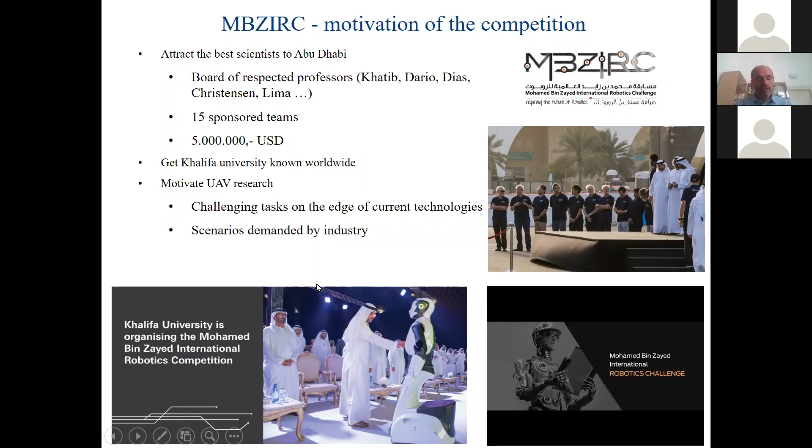This photo is here mainly to show the size of the team, which will progressively grow as the competition gets more complex. You can see that the Czech Technical University teamed with Penn and University of Lincoln. Penn was there mainly because of their expertise in low-level control, while University of Lincoln collaborated on vision at that time. Okay, I'll get on with it.

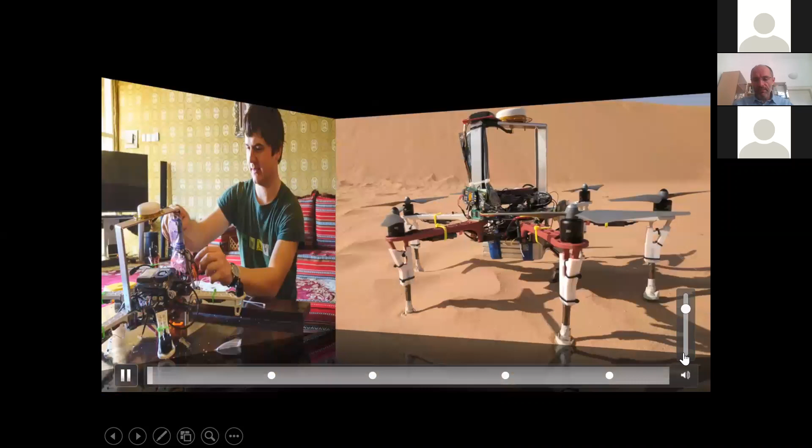So this is the preparation for the first challenge, and I will use it to introduce the tasks in the 2017 challenge. The first task is to find colored targets placed on small pillars, and here you see the training session. Our group really took the competition seriously, and they went to the desert about a month before, because conditions there are very different from what we have in Europe.

It's quite windy and sandy. So one of the tasks in the competition was to collect specific colored discs and drop them into a box. You can already see it's quite windy here, and this is the drop of the target. So this is some sort of collect-items-and-drop-them-into-a-predefined-box task, maybe also involving sorting, because there's more than one box.

The second task was to land on a moving target, which you will see later in the competition. There will be a moving vehicle with a landing platform on the roof, and the drone's problem is to find the vehicle and land safely within a predefined area.

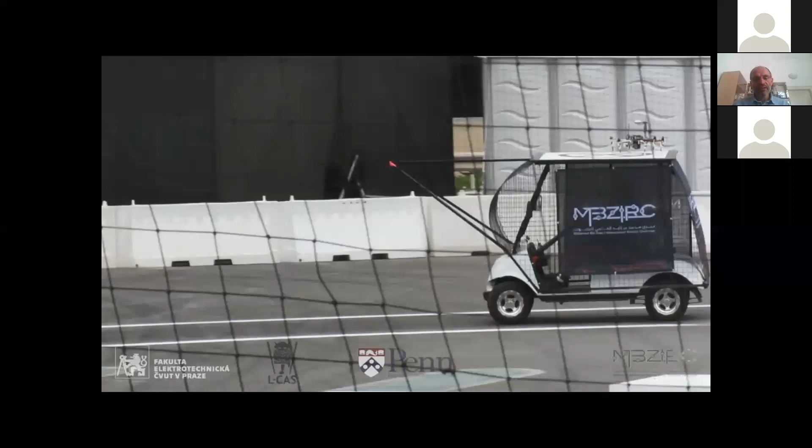So this is the second round, had to do it twice. You see the drone first localizes the vehicle, and then in this windy conditions, you have to synchronize with the vehicle, get the target, and here we were lucky. So it's just like on the edge, but it's okay.

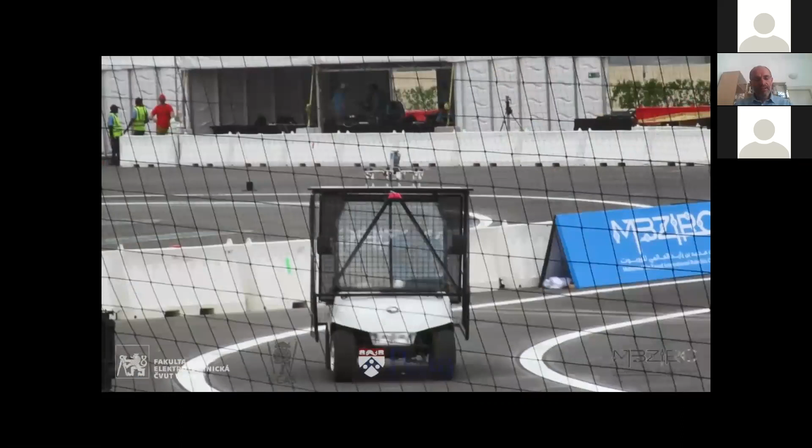So that's maybe you can think about as applications of maybe track a moving vehicle and land and deliver something while the object is still moving.

This is part 2 of the competition. You see those discs distributed over the area, over the arena, and the task is to collect as many as possible and drop them in the box.

Okay, and I think the different colors are rewarded differently. Okay, so I think that's almost all from the 2017 challenge.

You see all the nets around the arena. Despite that, I think one of the Japanese participants' drones had a sort of algorithm which had a go-home button if you lose your position in the arena. Unfortunately, they did not reprogram the home from Tokyo, so the drone departed on the east and was never seen again.

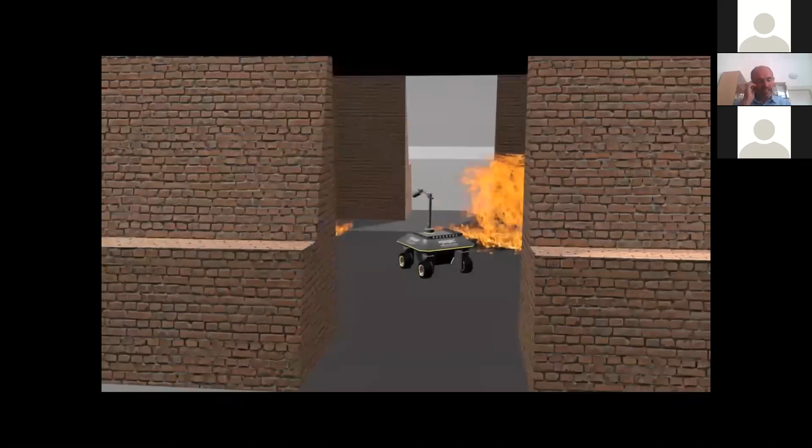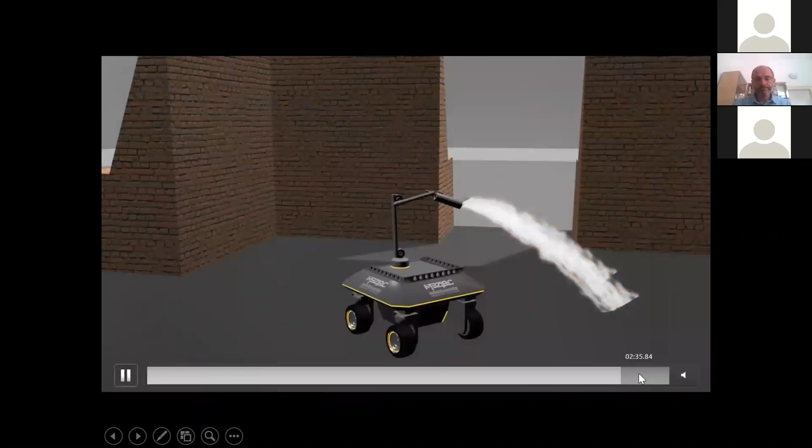Okay, so then it should collaborate with a ground-based robot, which could be much heavier. And again, the ground-based robot could put a blanket or water to quench or extinguish the fire. So in the grand challenge, you have to perform all three things.

Now, okay, fine. So how did it look in reality in the first task? There are 3 UAVs. 2 have to destroy 5 colored balloons, and the other one has to intercept the UAV flying with the ball. So that's at the top right here, now in the middle. This is what you'll have to catch, and then you have to pop or puncture all those balloons.

We are using a RealSense camera, which is RGB-D, and for capturing the ball we used a LiDAR. You'll see why. These balls, of course, are fairly easy to localize, but still the color changes according to daylight conditions.

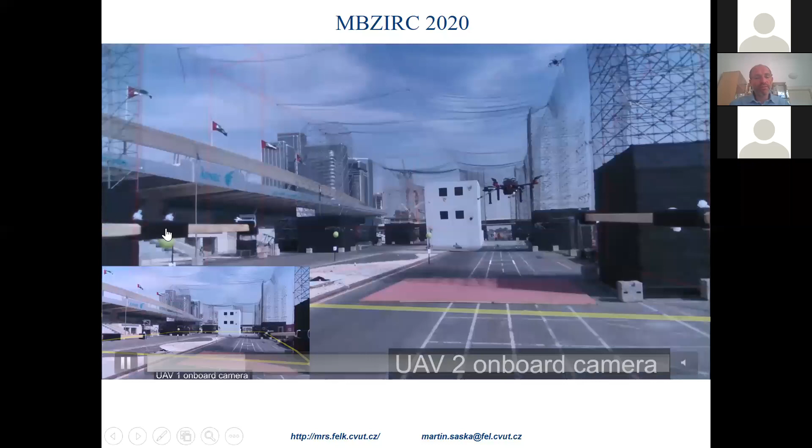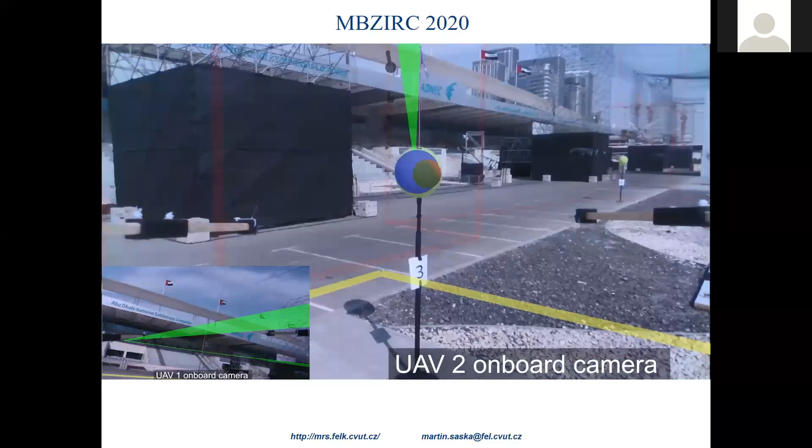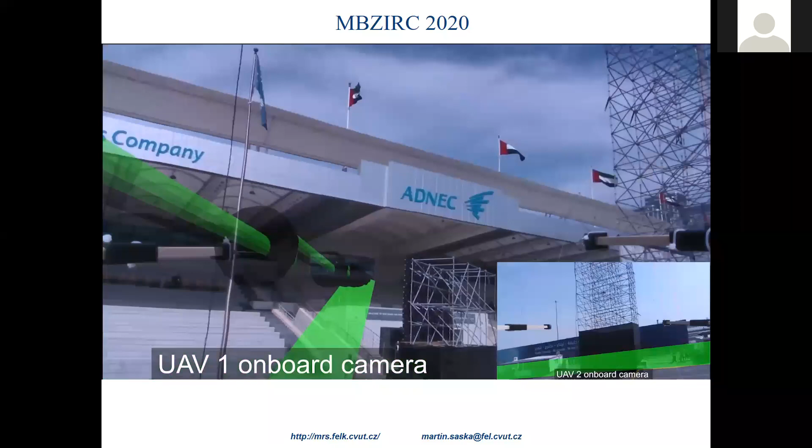We'll see a picture of the UAV. We also have to have a device to puncture the balloons, and they are at a fixed height. You know the height before, so we use for navigation just GPS and IMU, consumer grade more or less.

So in the end, our global position was quite imprecise. We could land in the predefined area, but maybe with 2-3 meters of integrated error. We had a LiDAR time-of-flight thing to get the height.

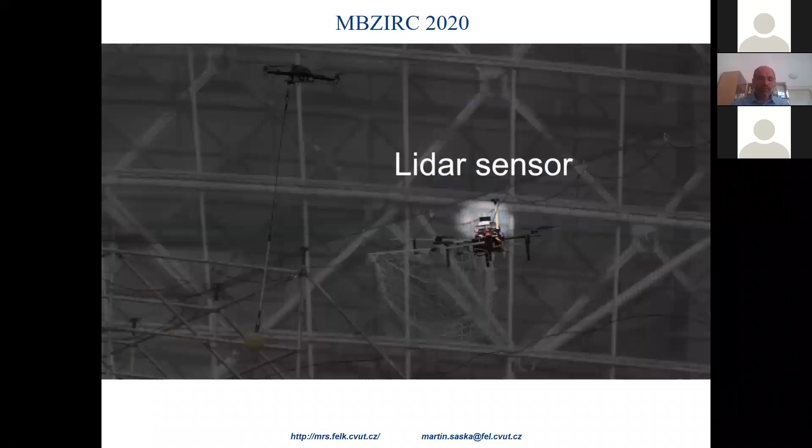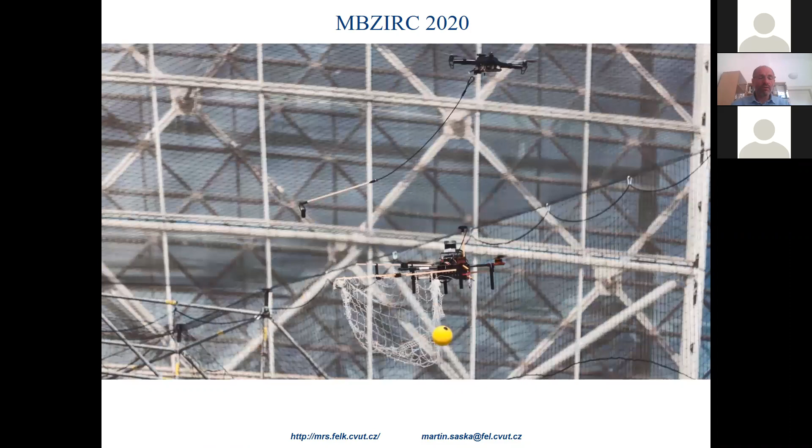For the drone interception, we used the LiDAR because it turned out that the cameras did not work. When we got very near, the ball was getting often out of the field of view. Or because it's also windy, and the drone creates some airflow around it, so it was difficult to keep it in the field of view.

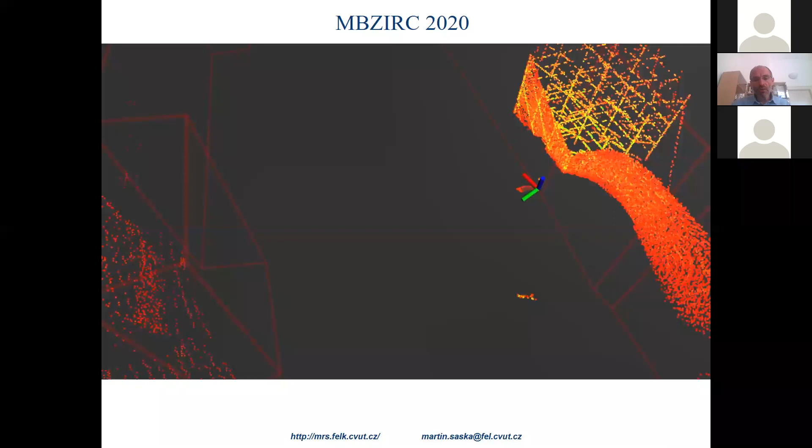So we had this lurking approach where first we localized the drone, which was flying on a fixed trajectory, again like an 8 shape. You didn't know where it would be a priori, you didn't know the tilt of the trajectory, but you knew roughly the size. It was like a 40 by 20 meter loop.

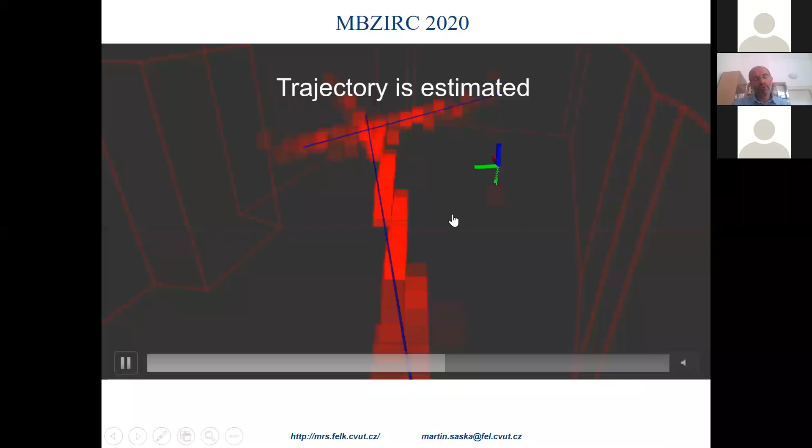And we sort of detected it. For the second round, we were waiting for the drone to come back. We managed to intercept it, but we couldn't hold it.

By the winners from Beijing University, they had a chasing approach, so sort of get hold of it and chase.

Yeah, so here's the flying thing. Okay, so we sort of hit the ball, but did not hold it in the net. You could see it was like a near miss.

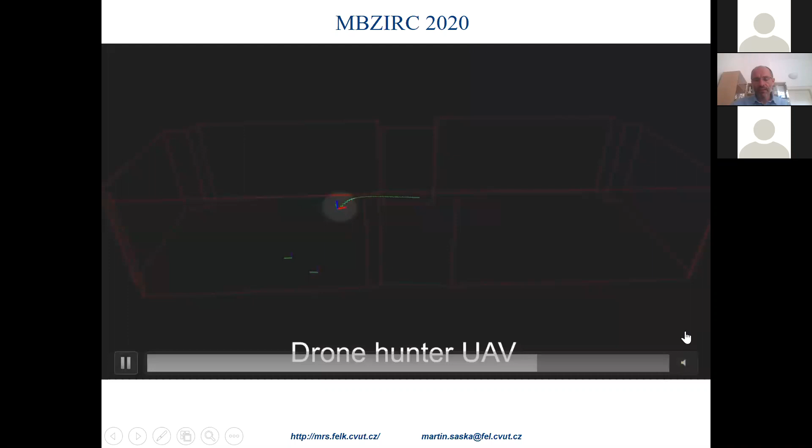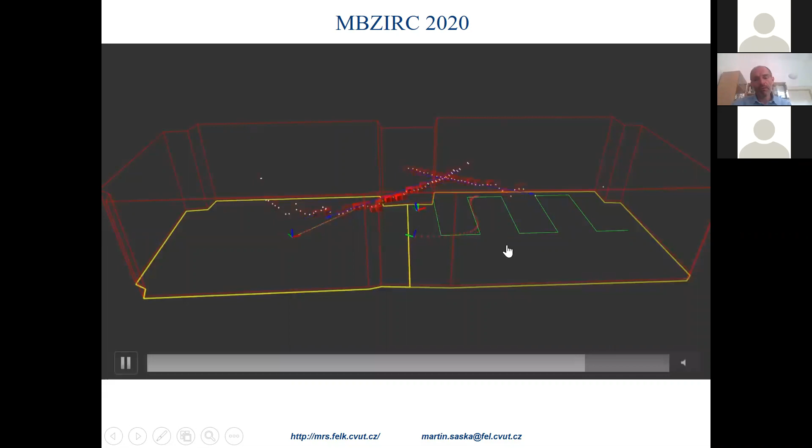So all of these tasks have to be completed simultaneously, which means that the robots, the UAVs, should not hit each other. But it sort of made it a little bit easier because this is the trajectory of the flying helicopter. It's higher, it's above the area where you can expect the balloons. And the 2 robots which are popping the balloons can sort of split the area.

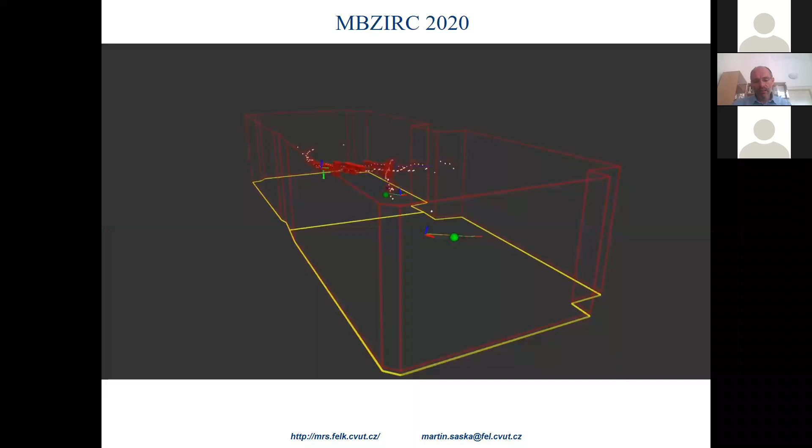Okay, so this is some visualization of what the model of the situation is for the robots in 3D.

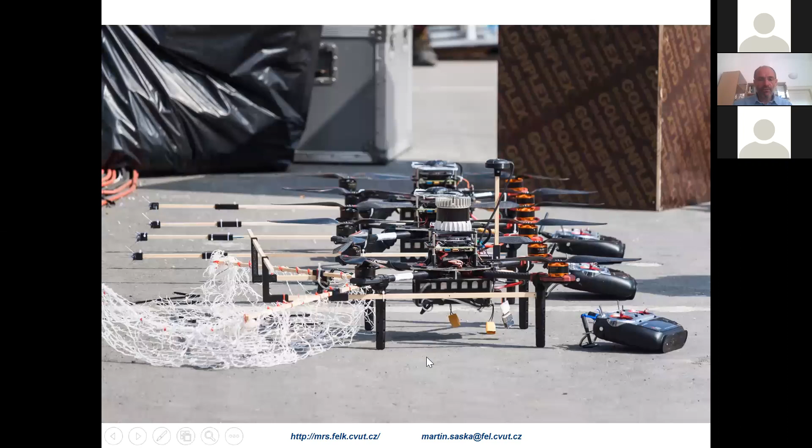Okay, so now let's have a look at task number 1. Again, the drones were different. These were the capturing drones for collecting the ball. You see more details here, so perhaps I will not describe it; the picture speaks for itself.

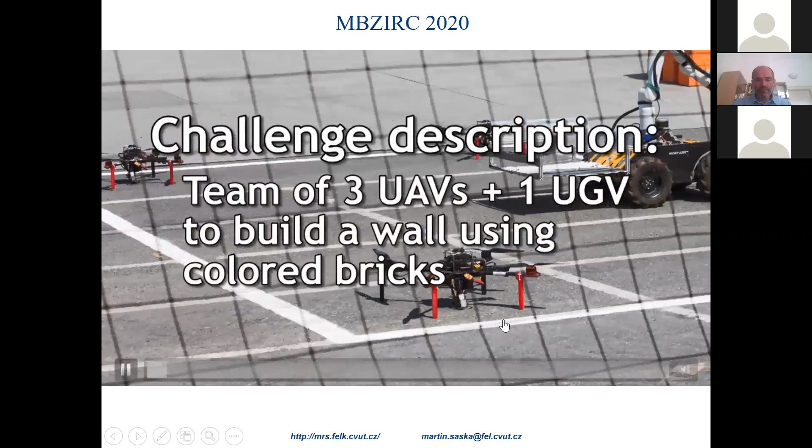Now, challenge number 2, which is collecting the bricks. Let's look at that one. I think it's down here. So again, a slightly different setup: there's 3 UAVs to collect bricks plus a ground vehicle, and we had the biggest problem here.

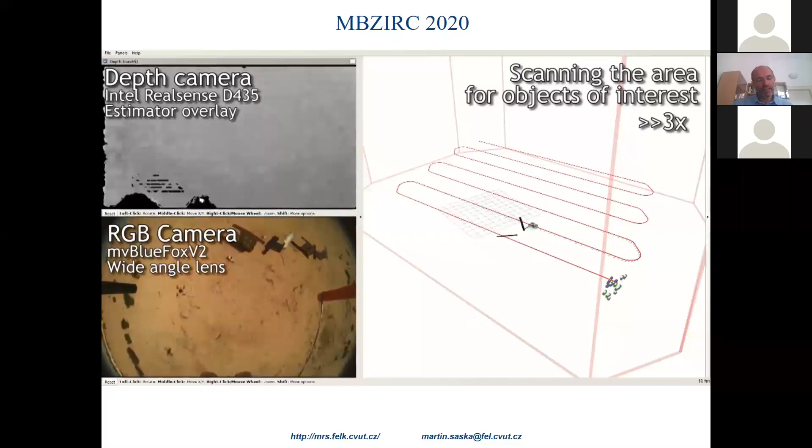We had the biggest problem with dropping the bricks, because we didn't want to sort of almost land. We wanted to drop the brick before it touches ground, because it was difficult to control the UAV once it touches the ground, as you lose some degrees of freedom in the control.

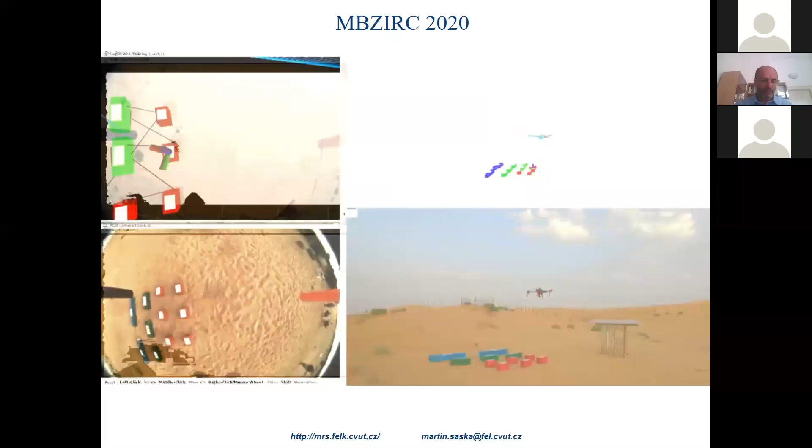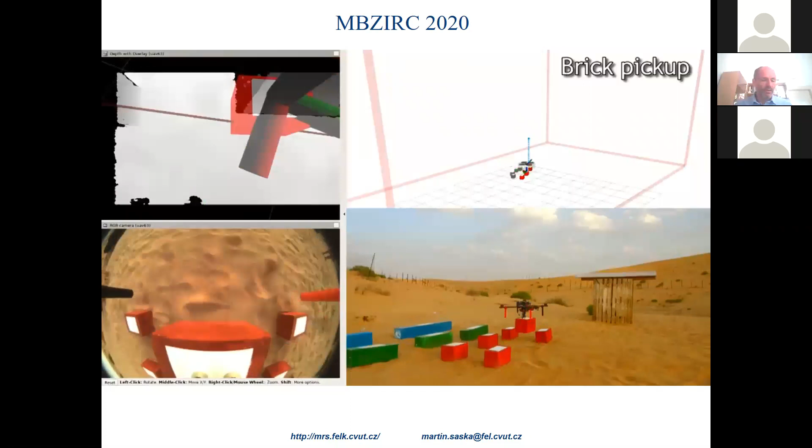So this task is like localized. You see this fisheye camera that we used. You have to get to the right distance, collect it, and then drop it onto a fairly narrow target area.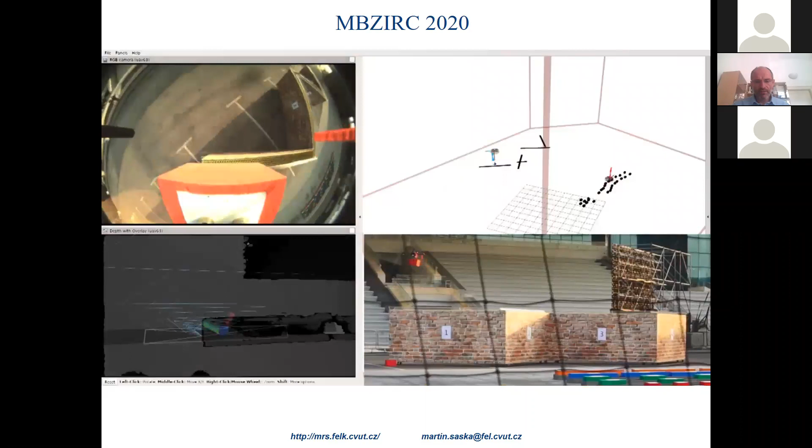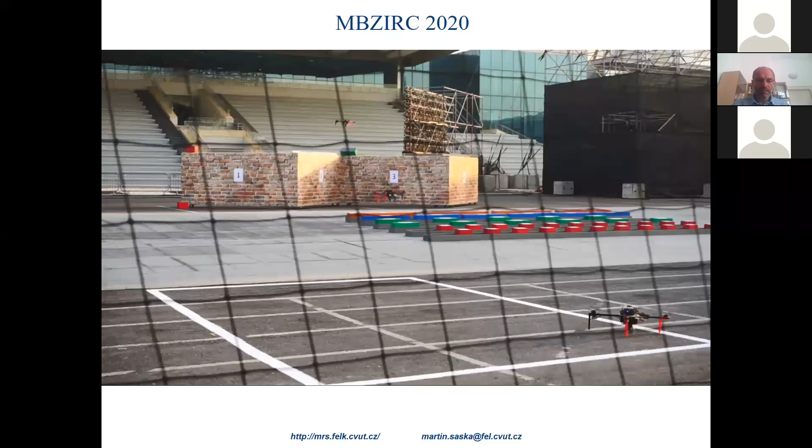Again, this is probably modeling some sort of delivery type of behavior, in a collaborative scenario where there's more than one drone around.

And then okay, we can skip the ground vehicle. This is not the place - we are in a UAV, not robotics, workshop.

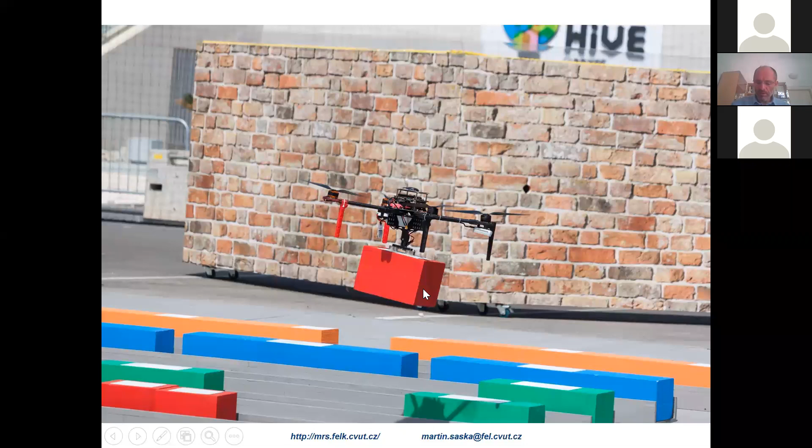So maybe for the recording, I inserted one image where you see the drone in more detail, so people who are in the business will recognize the components. Okay, maybe the third challenge is the most interesting one.

So that's the quench the fire one. There are 3 UAVs that localize and extinguish fires. One UAV is dedicated to ground fires, that's the one with the blanket.

You see it there. You need a special setup, a claw mechanism for blanket deployment. Maybe I'll stop it in a minute here.

So what you see here is a model of a fire. This red piece of cloth is moving like flames, and you see these thermal emitting parts here, which get hot and are quite nicely visible in the thermal camera, because this exercise should test the use of thermal cameras. When you put the blanket on this area, your scoring is based on how many of these thermal emitting elements you cover.

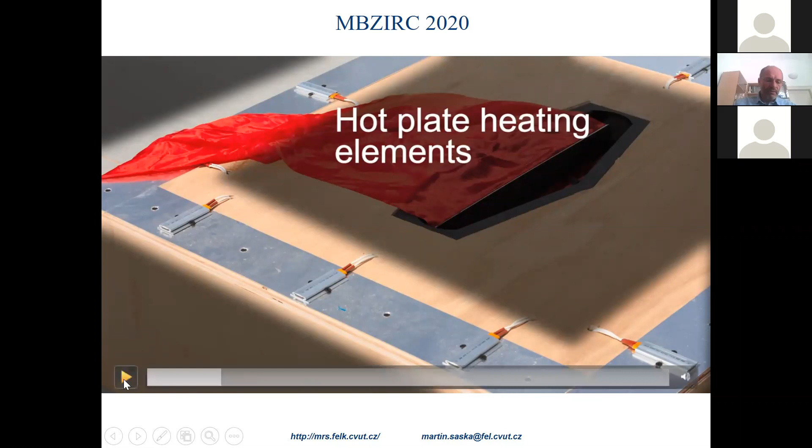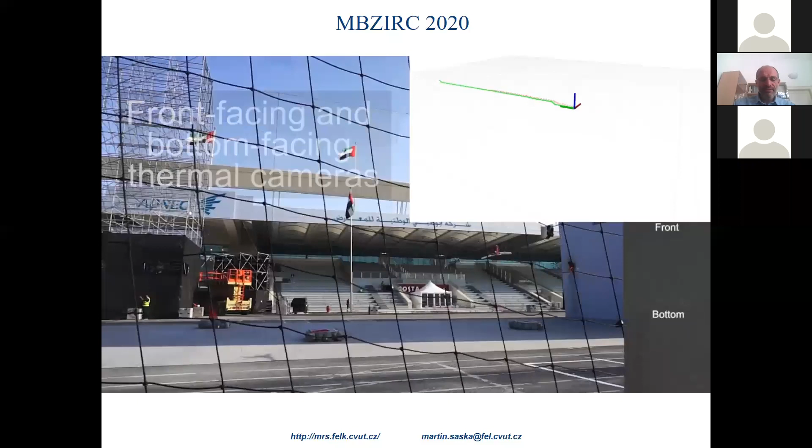So you have to find the fire, and maybe the main challenge is to put the blanket in a way that covers the area the best. You see that there's some fan, and now let's see what happens.

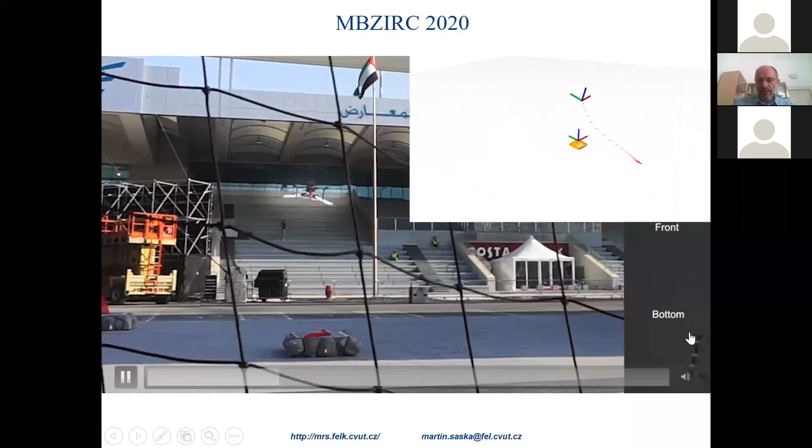You see on the right, images from the thermal camera, the bottom one, there's a front and bottom, and now, okay, sort of semi-success. So there are thermal cameras and some RGBD camera.

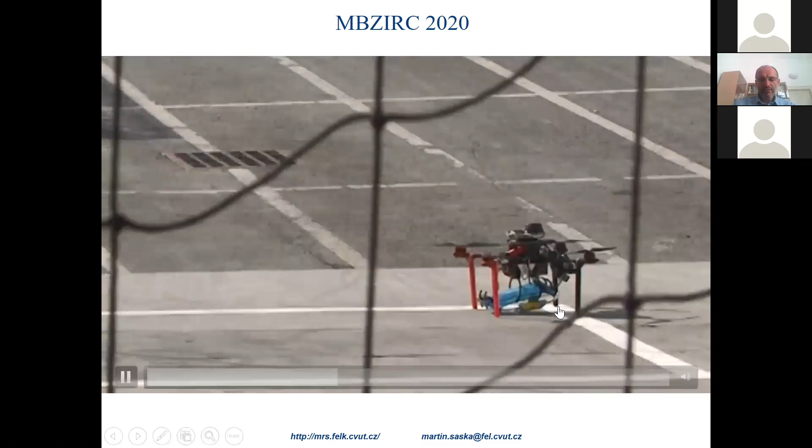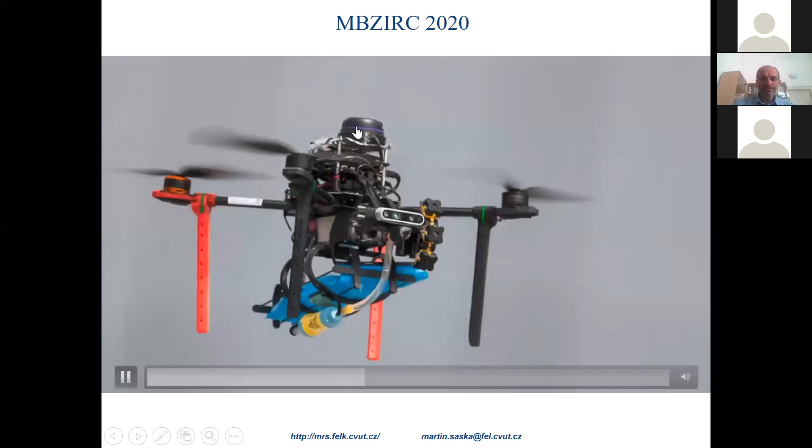So this one is very tricky. Here you have to have a device that squirts water, and you have the thermal cameras for localization, the RealSense camera to get the distance, also the LiDAR for localization. Interestingly, the scoring is difficult to measure fire extinguishing, so the organizers measured the amount of water that you managed to get through the hole where the fire was coming from.

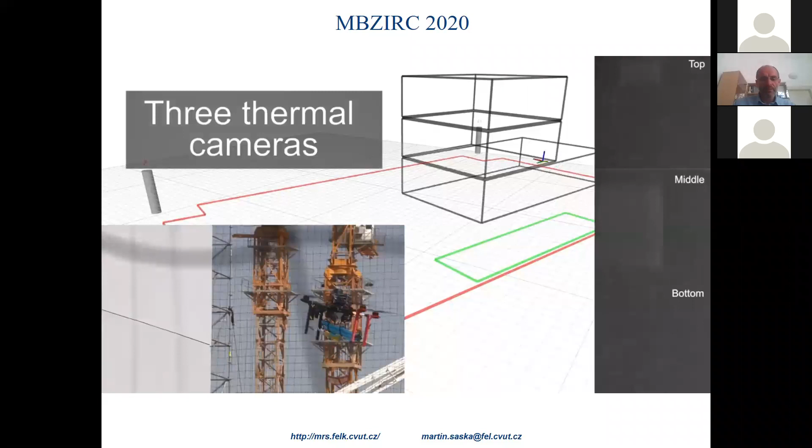So first you have to find the fire, you can see it on the right in the thermal camera. Then it's about correct positioning.

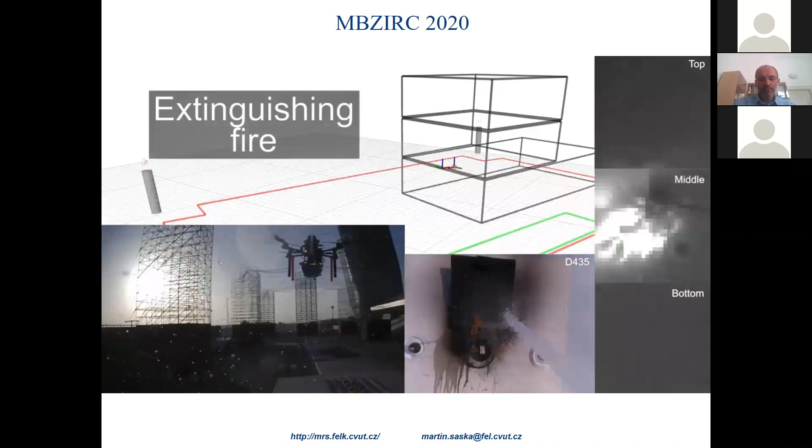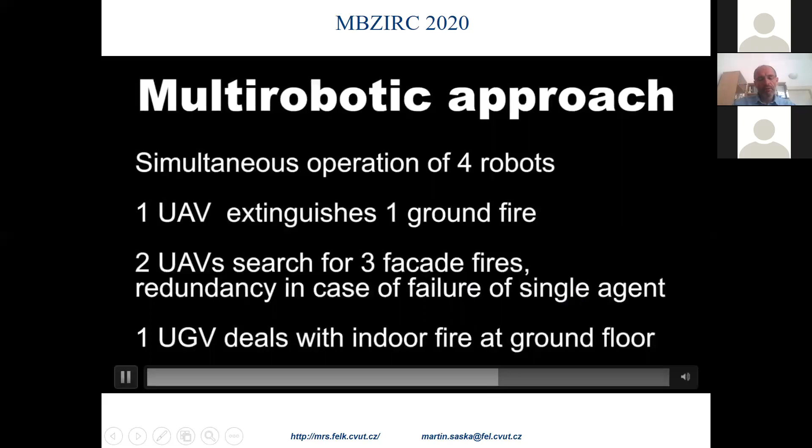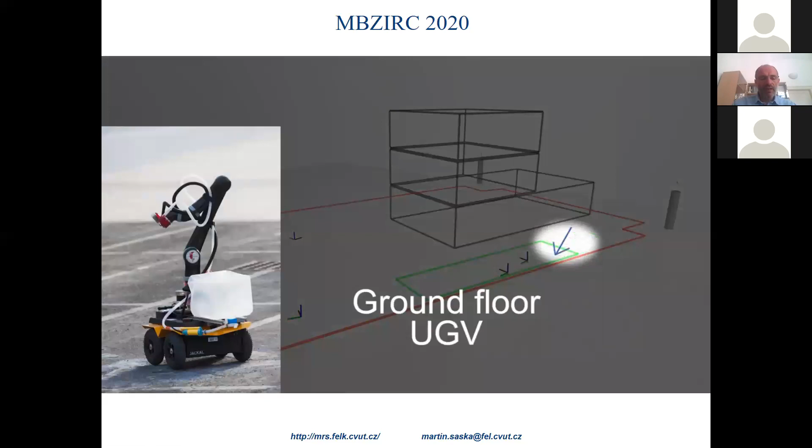And since now your problem is that you don't have an independent degree of freedom for controlling, let's say, the water flow - you had to control it by the movement of the UAV itself - now your flight path, your flying control, is integrated with your objective to quench the fire.

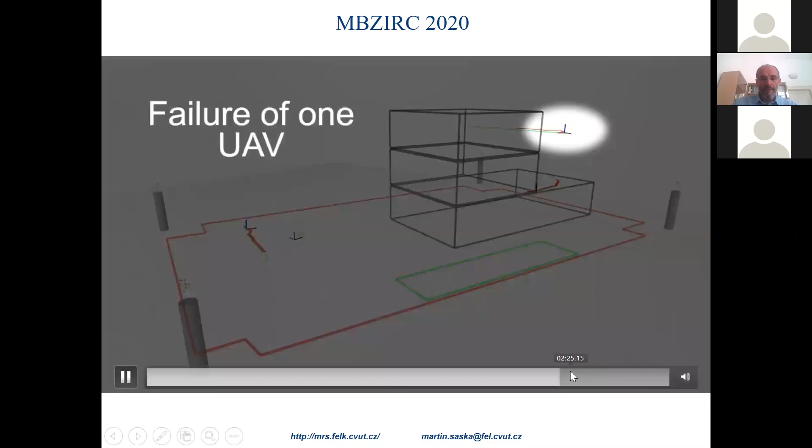So one of the UAVs failed, these things happen, but then we managed to localize the fire, and you see the details of squirting water, trying to get it through the hole.

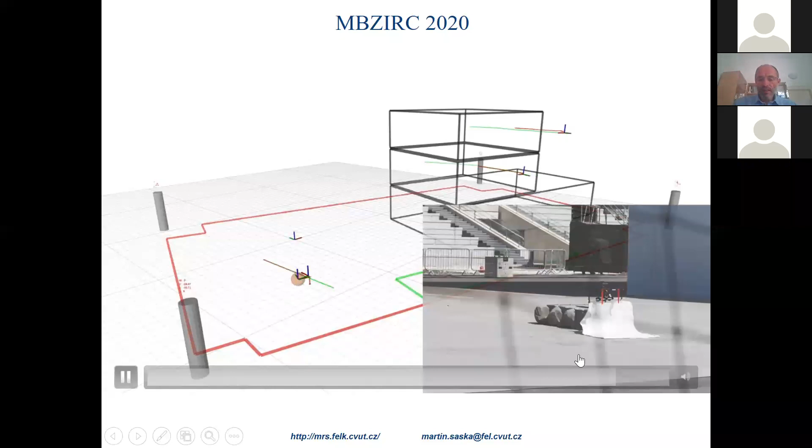This is the ground extinguishing one. But you see that it's the end game, the final part, and managing to be precise is very, very important here. And everything has to be done autonomously.

You have the opportunity to land all the robots, refill water, and then restart all in a 20-minute slot.

So fine, this is just a detail of how the arena looks like. This is the fire, that's the size of the hole, and now a robot approaching it and delivering water.

Now I'll switch to the DARPA Subterranean Challenge. So here, the idea is rescue missions, and mainly, perhaps unlike this MBZIRC challenge, which is UAVs mainly, the DARPA challenge is probably ground vehicles mainly.

They are supposed to find perhaps victims of some disasters in underground spaces. The task is to localize things like a fire extinguisher, or a body of someone injured.

The challenge is that you have no communication with the robots inside, and in this mining environment, you might have corners which even complicate communications between the ground robots and the UAVs. The UAVs have to report location of found objects.

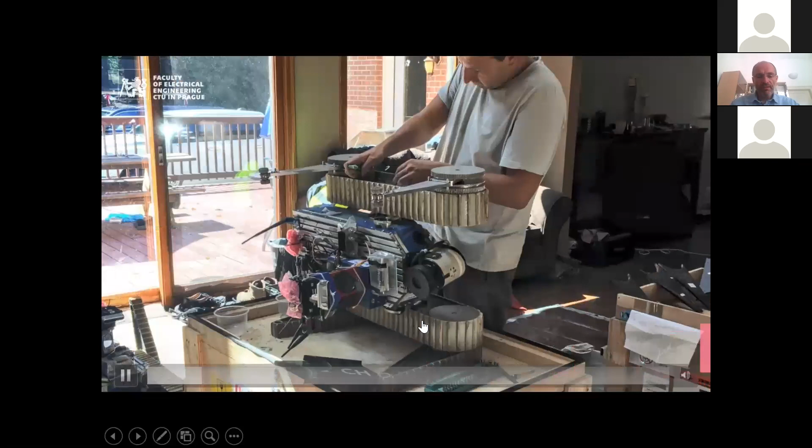So you do have some, as usual, preparation time, and as I said here, the ground vehicles are more important than the drones. The drone setup in...